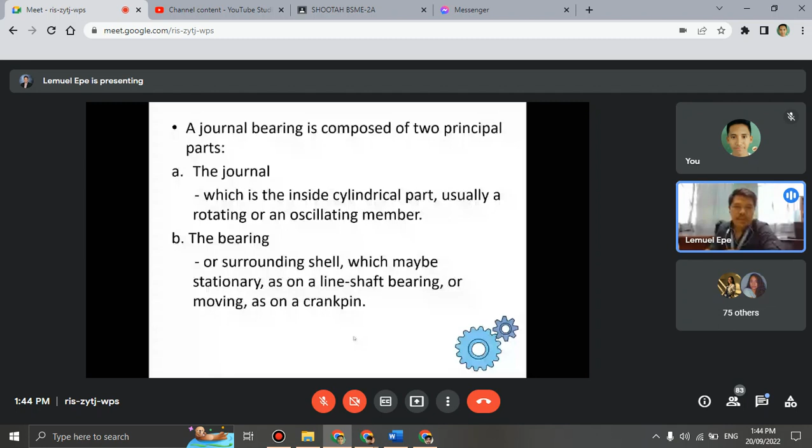You've probably opened a machine, like a combustion engine, where this is used on the crankshaft — that is called the journal. So that is an example of a journal bearing. Since there is direct contact between the bearing and the shaft, unlike the ball and roller where there is minimal contact with the shaft, for the journal the contact is large — covering the whole surface of the journal or the shaft.

Since there is a large contact area, we need to apply lubrication — that's where the lubricant is placed. And there's also a spacing, very small, that we cannot see with the naked eye. To determine the thickness of that spacing, we use a feeler gauge, or a thin sheet of metal.

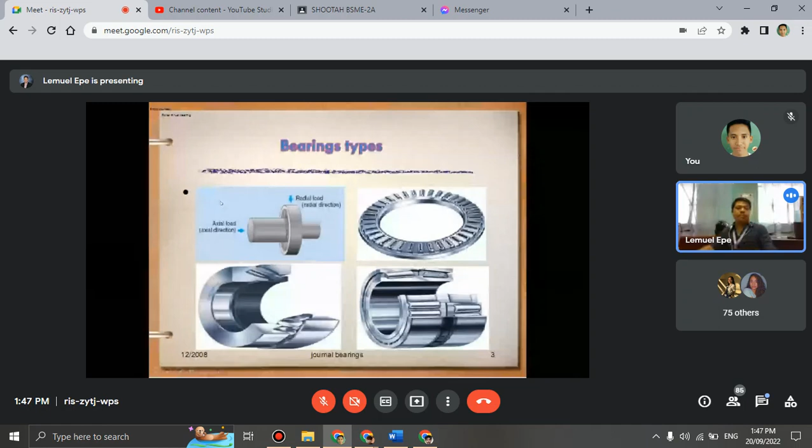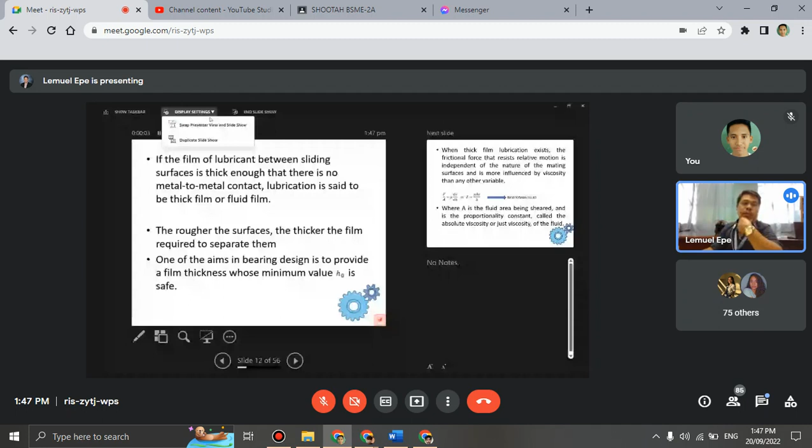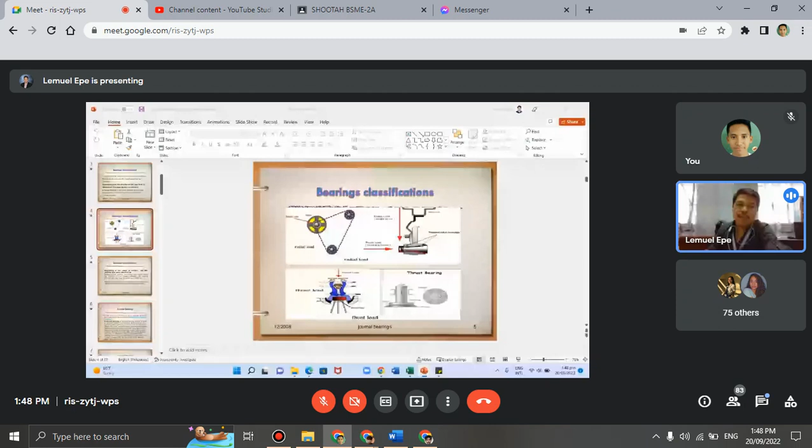So the rotating member, that is the shaft or what we call the journal — that's the journal. Then this part is the shell, which is the bearing. Okay, let's go back to the types. Okay, we're done with the types.

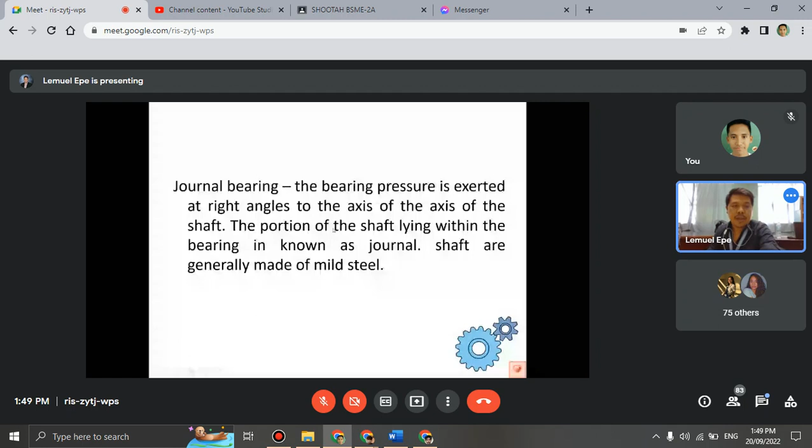The rougher the surfaces, the thicker the film required. This film is the lubricant thickness or the spacing, the minimum thickness of the lubricant oil. One of the aims in bearing design is to provide a film thickness whose minimum value is safe. Our symbol for the minimum clearance, based on the book of Faires, Design of Machine Elements, is h sub 0 for the minimum clearance or film thickness.

When thick film lubrication exists, the frictional force that resists relative motion is independent of the nature of the mating surfaces and is more influenced by viscosity than any other variable.

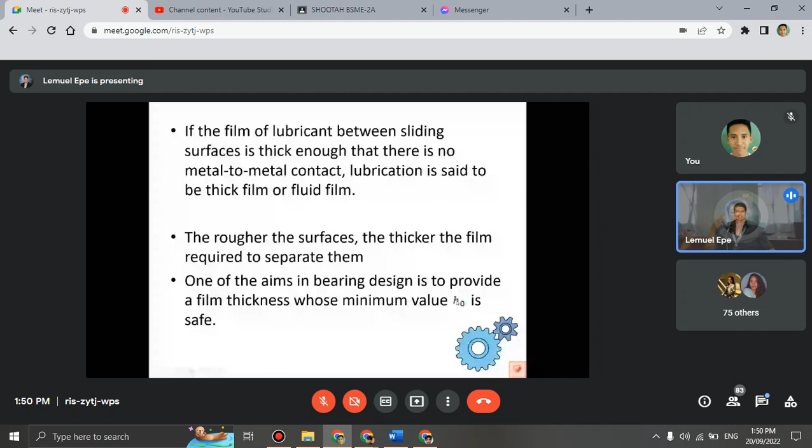From our knowledge in fluid mechanics, the shearing stress is proportional to the rate of change of speed with respect to the film thickness. So to make this an equation, we add a proportionality constant, and that constant is called the viscosity. We use the symbol mu for viscosity.

V here is the linear speed at the surface of the shaft. Let me draw this out better.

So this is the bearing, and the shaft or journal. The shear force is such that when you say shearing stress, the force is parallel to the area, that's stress as force per unit area. There are generally two types: normal and shearing stress. Normal stress is when the force is perpendicular to the resisting area, but for shearing stress, the force is parallel to the resisting area.

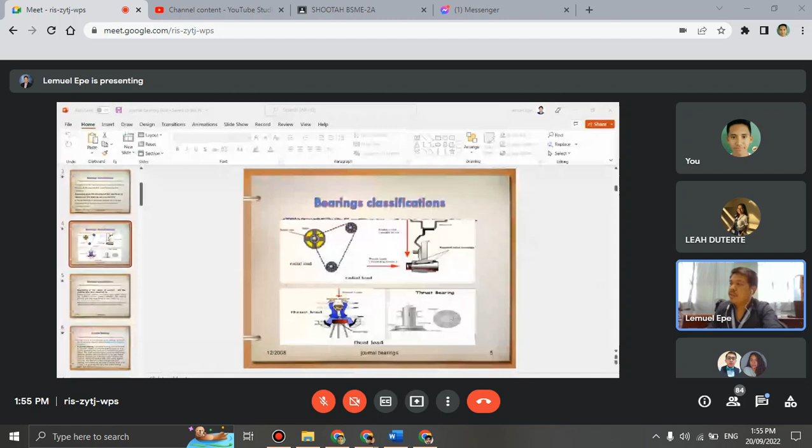So the diametral clearance is equal to the difference between the diameter of the bearing and the diameter of the shaft or journal. Now, if we want to determine the radial clearance: since diameter or radius is half of the diameter, the radial clearance is therefore half of the diametral clearance.

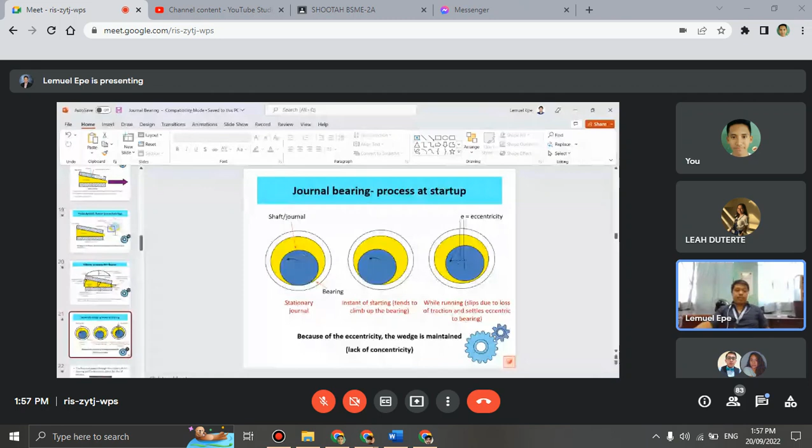Again, the diametral clearance is the difference between the diameter of the bearing and the diameter of the journal or shaft. And the radial clearance is half of the diametral clearance. So H here denotes the radial clearance.

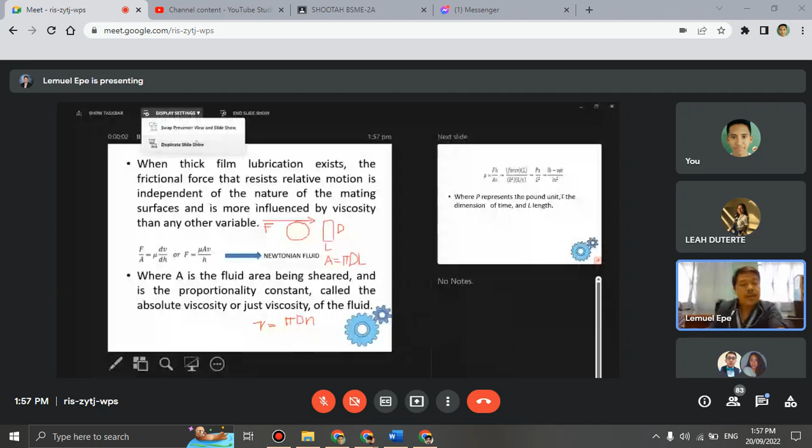So shearing stress is proportional to the velocity gradient, which is velocity over the radial clearance. To equate the two, we put a proportionality constant, mu, known as the viscosity or absolute viscosity. So we can write this to get the shear force.

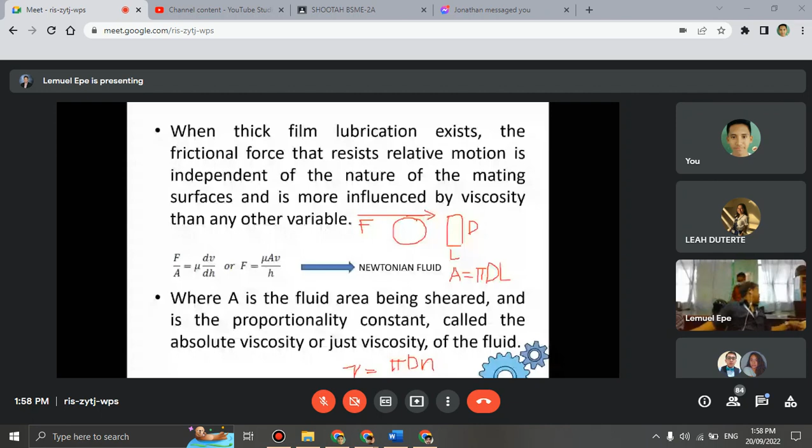Okay, let's proceed.

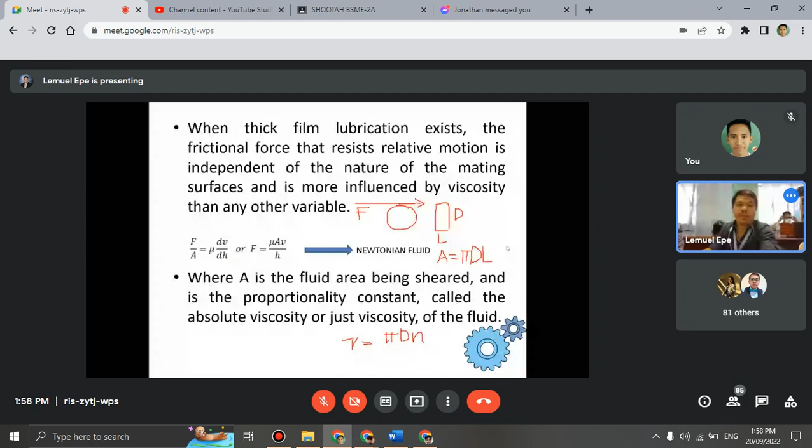So what is the unit of viscosity? In the English system, force is in pounds, H is in inches, area is in square inches, and velocity V is in inches per second. So the equivalent unit of absolute viscosity is pound-second per square inch, or PSI-second, since pounds per square inch is PSI.

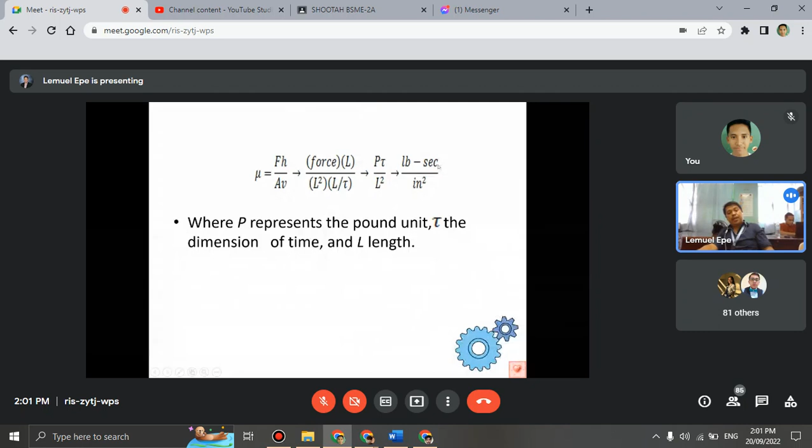Now if we connect this force to the frictional torque: we know that torque is equal to force times the radius. So we just multiply the formula for force by the radius of the journal.

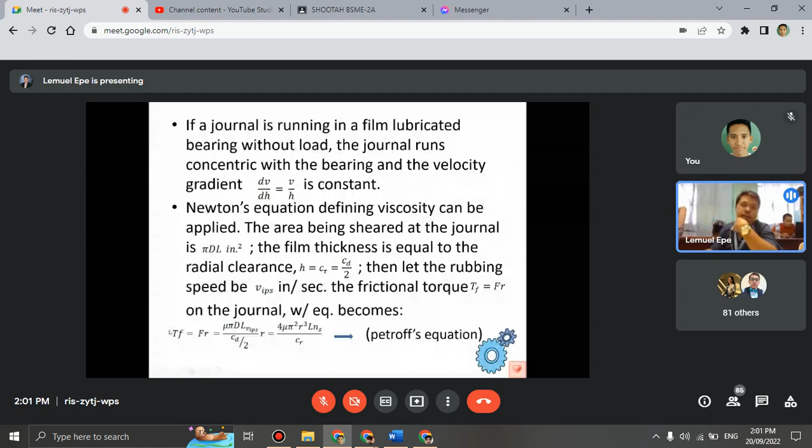When the surfaces in relative motion are so oriented that their motion causes the oil pressure to build up enough to support the load without metal-to-metal contact, the lubrication is said to be hydrodynamic.

So it seems like the shaft or journal floats due to the pressure build up. It's also called full film, thick film, or flooded lubrication. A thick film of lubricant is interposed between the surfaces of the bodies in relative motion, so there has to be pressure build up in the film due to the relative motion of the surfaces.

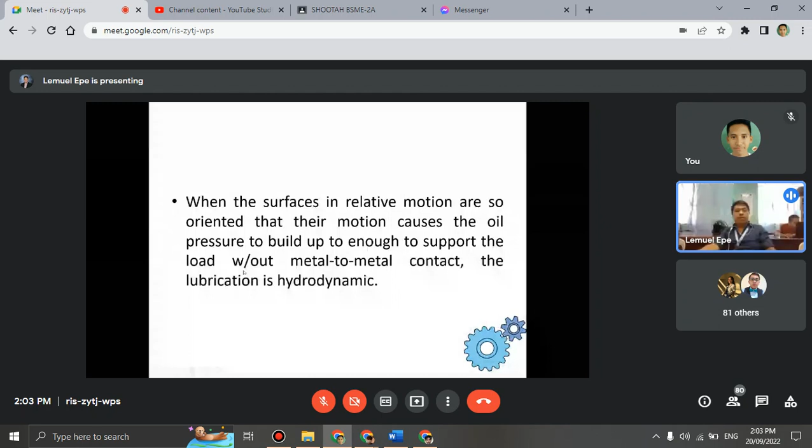So that is the hydrodynamic theory in journal bearings. Once the shaft is rotating, it does not touch the bearing, so there's enough pressure already to carry the load. So there is no metal-to-metal contact.

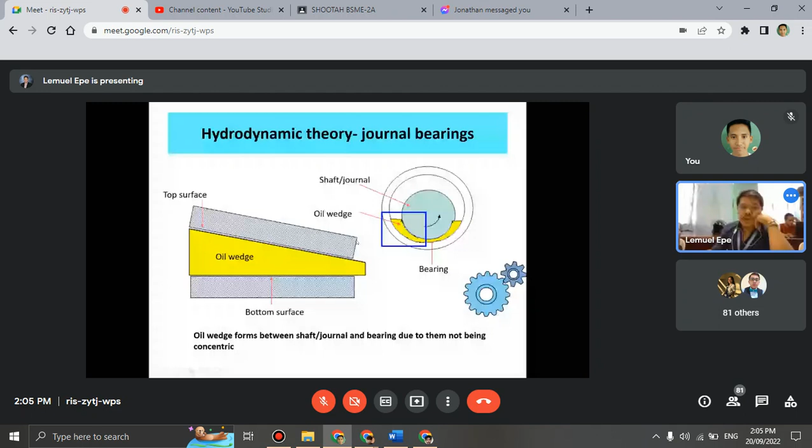Okay, this is the position of the journal or the shaft in this figure. When the shaft is stationary, this is the position. As you can see, the shaft touches the bearing at the bottom.

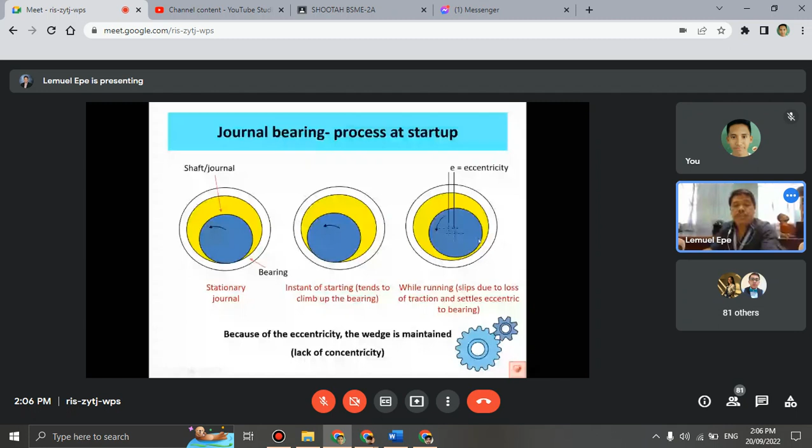So from that figure in the book of Faires, the eccentricity is equal to the radial clearance. Radial clearance is the diametral clearance C sub D over 2, minus the minimum film thickness, h sub 0.

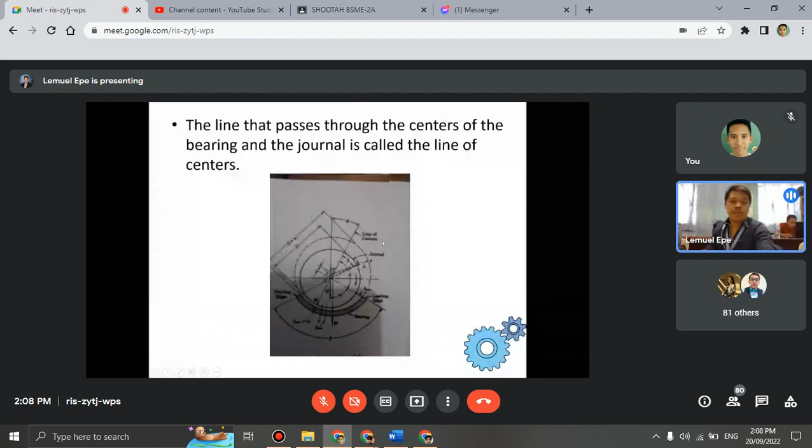The load carrying length of the bearing measured in a circumferential direction will be called the arc length, denoted L sub A. It is the arc of the journal or the bearing subtended by the angle beta. So the arc length is equal to radius times the angle subtended, in radians.

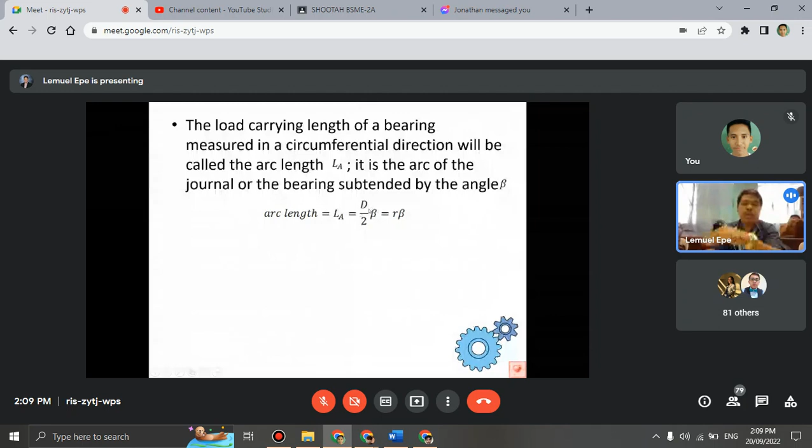Of the infinite number of solutions that can be found for a design situation, Kingsbury showed that for a particular surface supporting arc beta, there is a certain eccentricity ratio that results in maximum load capacity and another eccentricity ratio that results in minimum frictional energy loss. So the corresponding bearings are called optimum bearings.

Especially in bearings subjected to heavy loads or large frictional losses, the designer may be well advised to work towards an optimum. The various optimums are defined in the headings of tables - those variables or constants I mentioned earlier. We can see them in tables 20 to 23 in the book by Faires.

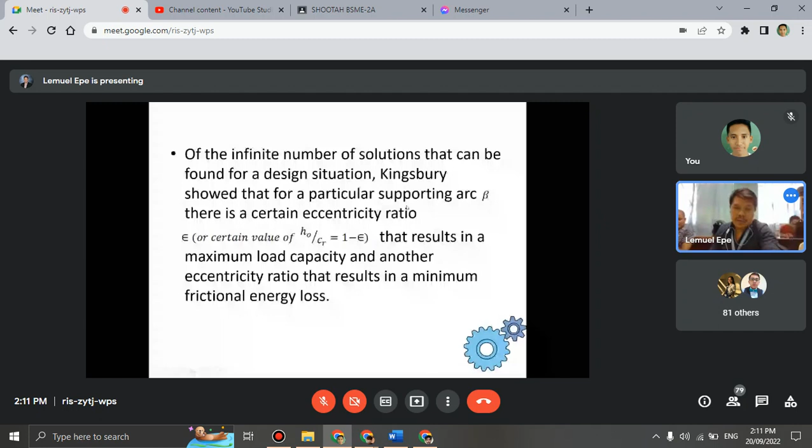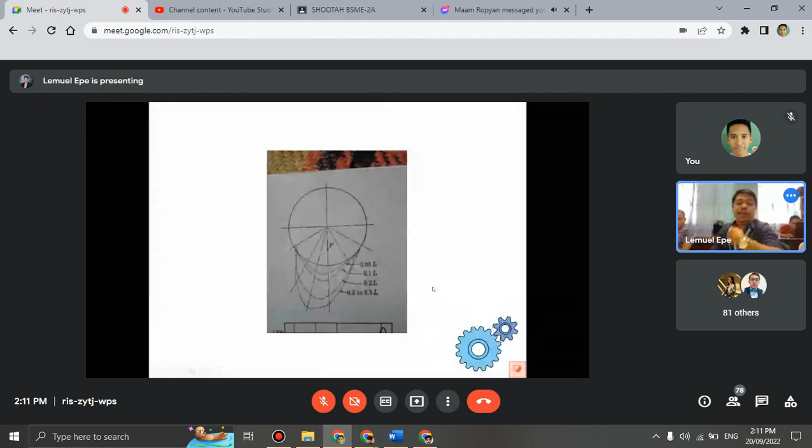Since there is friction, even with lubricant, there is still friction, but it's minimized because of the lubricant. So the energy from the source or the driver, the electric motor, isn't it equal to the output power? So there are losses, converted into another form. This is the heat loss due to friction between the journal and the lubricant.

So to compute that, we'll use this basic formula for heat: Q equal to m c delta T. But the symbol used here for mass is W.

So the mass is also equal to the product of density and the volume flow rate, since this can be a mass flow rate too. Density is equal to mass over volume, so this can also be mass flow rate over volume flow rate. So mass flow rate is equal to the product of density and the volume flow rate. But the symbol used in the book of Faires is different: mass flow rate is W and volume flow rate is Q, small letter q.

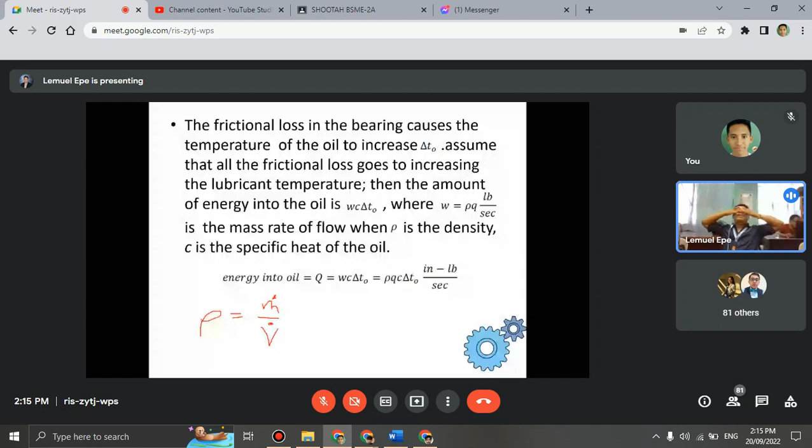So this is equal to the heat loss, Q, which relates to the mass flow rate. This heat is per unit time, so it ends up being expressed per unit of power, as a rate of heat loss.

In the design of an actual bearing of any importance, one should probably investigate the effects of changing some parameters over which there is control, for example the clearance or clearance ratio. This is the relation of the radial clearance and the minimum film thickness.

So we have here the standard clearances, depending on the shaft diameter or journal diameter and the material used for the shaft.

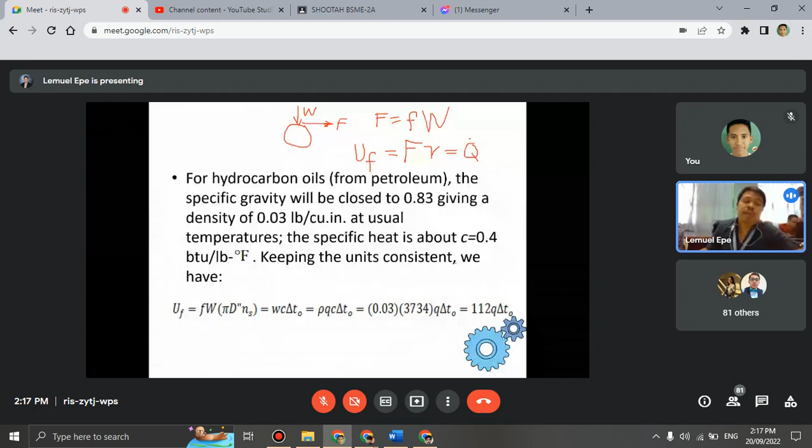The heat loss can also be estimated using this convective heat transfer formula, where H is the convection heat transfer coefficient, times the area and the difference in temperature.

An old rule of thumb states to allow a heat loss in still air of 2 BTU per hour per square foot per degree Fahrenheit. So h_cr in foot-pounds per minute per square inch per degree Fahrenheit is equivalent to 0.18.

In still air, let's say inside the room, still air.

We also have some approximations adapted from Fuller, which may be used in connection with the equation for temperature ranges that will be reasonable. So for the temperature difference between oil and air.

For oil-ring bearings to air, still air, the delta T is 2 times the delta T of the bearing.

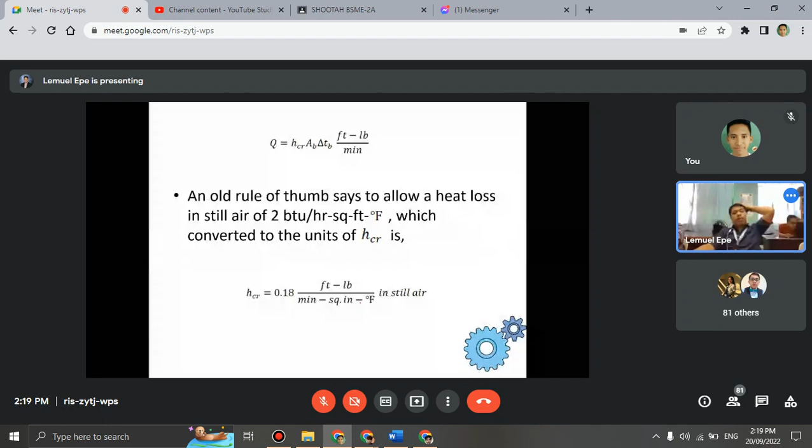For oil bath bearings, in still air, delta T is equal to 1.3 times the bearing temperature difference.

Then waste-packed bearings to still air: 2.5 times delta TB.

For the bearing area, this is used in the heat transfer equation, H times area times delta T. So that's the approximation.

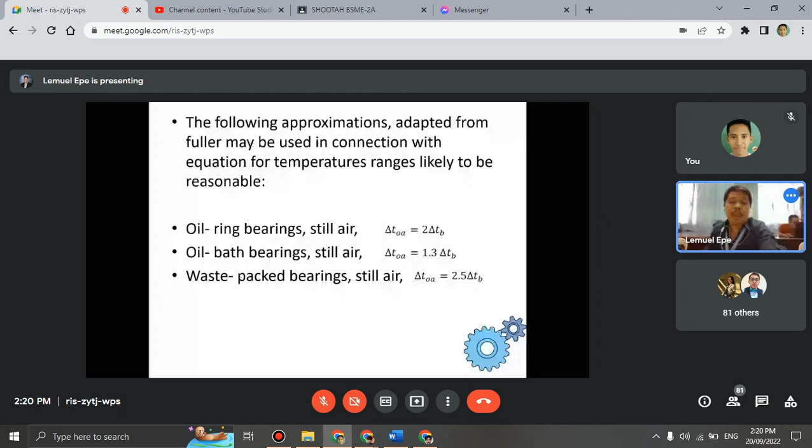Still, the unit is square inches. Fuller recommends an average of 12.5 DL for simple pillow block bearings, and 20 DL square inches for pillow blocks with separate shells. So it needs to be a pillow block.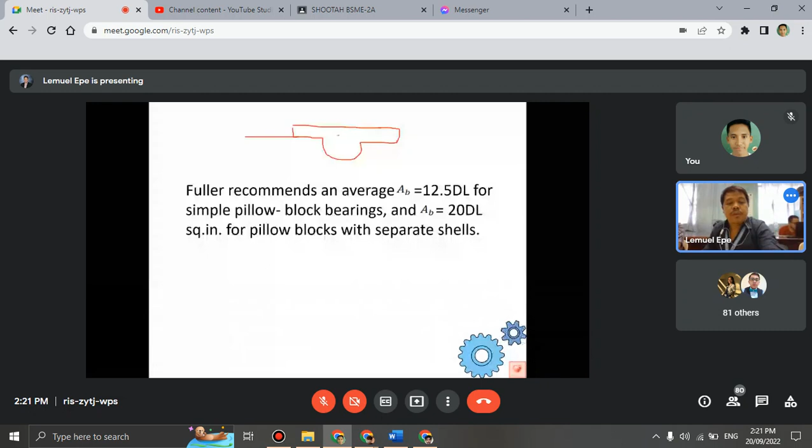Thrust bearing is used in beam mountings, propeller drives, turbines, etc. Here the shaft, unlike other bearings, passes through and beyond the ring. Sometimes thrust bearing is called collar bearing.

Okay, so this is the topic about what thrust bearing is, related to ball bearing.

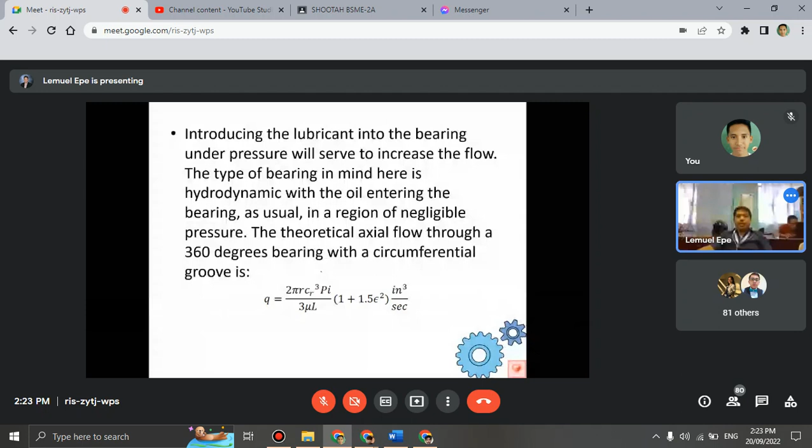Let the diameter of the shaft be given, so the shearing stress is equal to force F, the tangential force, over the surface area of the shaft enclosed by the bearing - that is, the pi D times the length of the bearing.

So the shearing stress is proportional to the velocity gradient. The velocity gradient is the velocity over the radial clearance. To make them equal, we introduce a proportionality constant, which is the absolute viscosity. So now we create the formula.

Then the torque, or frictional torque, is the tangential force times the radius of the shaft, or diameter, or radius, d over 2.

So the power loss due to frictional force is equal to frictional force times the linear speed. This is also equal to the mass flow rate of the lubricant oil times the specific heat of the oil and the difference in temperature.

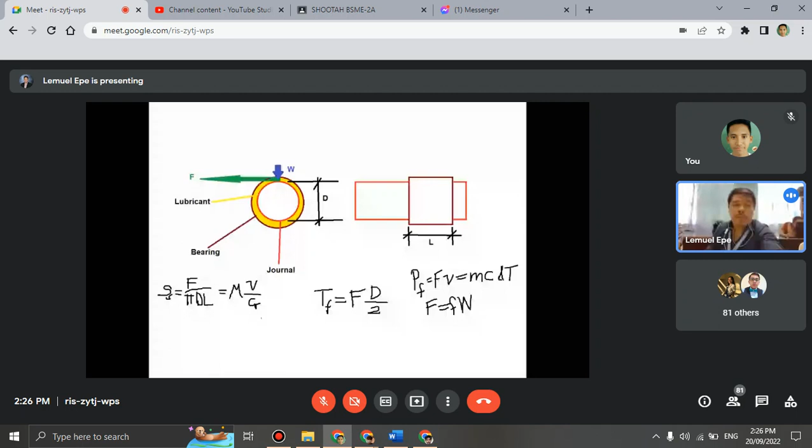So, journal - isn't that journal? Okay, here's an example on journal bearing. Happy birthday, Mana.

Journal bearing - this is a simple bearing in which a shaft journal rotates in a bearing with a layer separating the two parts to avoid wear effects.

I think this is familiar to you. This can be found in the combustion engine. This is the crankshaft, and connected to the crankshaft is the connecting rod.

So in the connecting rod, you place the journal bearing here. So here we have the journal, connected to the insert, which is the connecting rod, and the connecting rod connects to the piston.

So, types of sliding journal bearings. We have full journal bearings, where the angle of contact of the bearing with the journal is 360 degrees. That's why it's called full journal bearings.

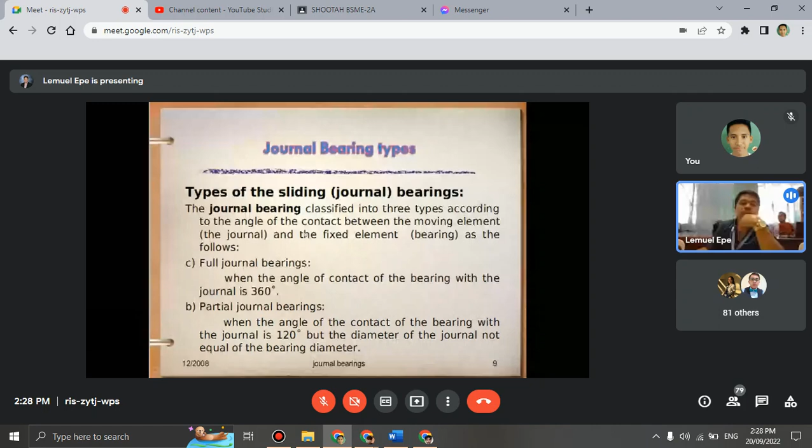Next we have partial journal bearings. Here the contact between the bearing and the journal is only 120 degrees.

So when the angle of contact of the bearing with the journal is 120 degrees, but the diameter of the journal is not equal to the bearing diameter.

Now the fitted journal bearings - when the angle of contact of the bearing with the journal is 120 degrees, but the diameter of the journal is equal to the bearing diameter.

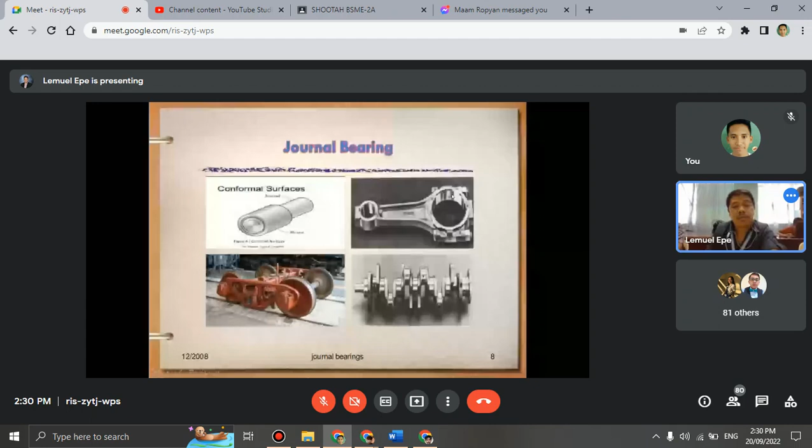So thick film is hydrodynamic lubricated bearings. When it's thin, that's thin film, partially in contact - so it does contact but only partially.

Properties of sliding contact bearings: we have compressive strength. The bearing material should have compressive strength to withstand the maximum pressure so as to prevent extrusion or other permanent deformation of the bearing.

Next is fatigue strength. The material should have sufficient fatigue strength to withstand repeated loads without developing surface fatigue cracks.

Another property that must be present in a journal bearing is conformability - it is the ability of the bearing material to accommodate shaft deflections and bearing inaccuracies.

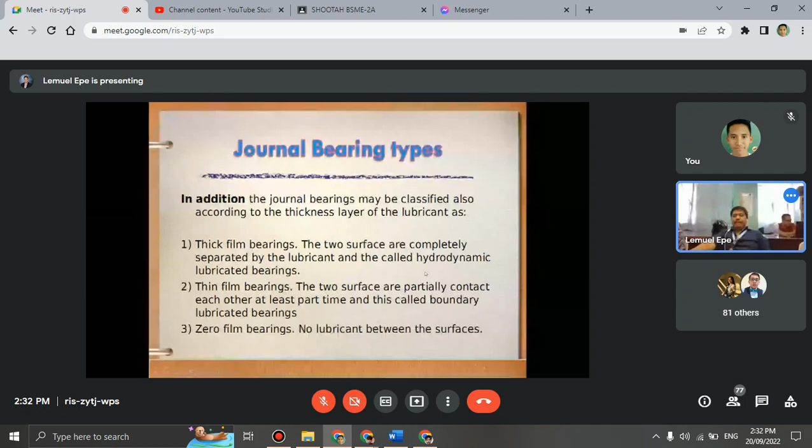Ay, I'm back. Hello? Can you hear me? So, sorry, the internet. Okay, let's continue.

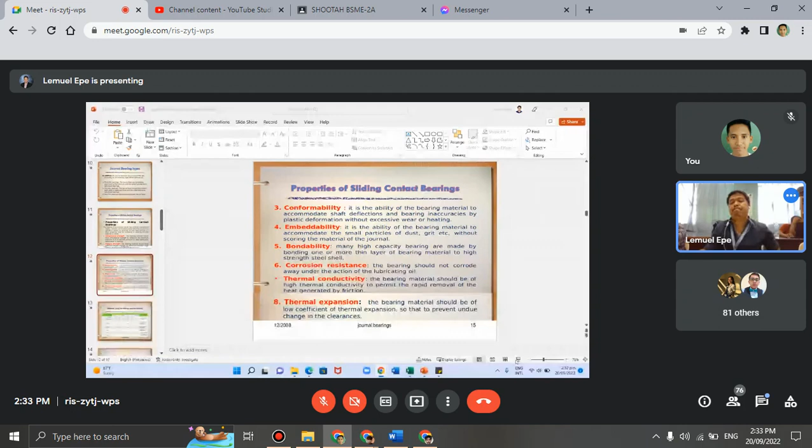So another property that must be present in a journal bearing is embeddability. It is the ability of the bearing material to accommodate small particles of dust, grit, etc. without scoring the material of the journal.

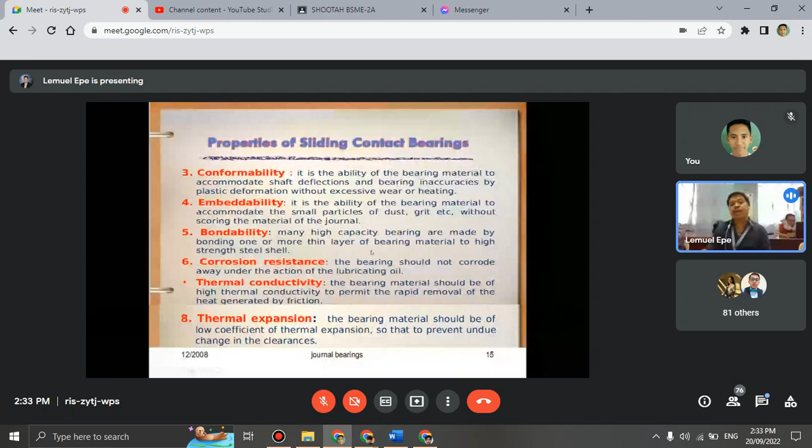Bondability - many high capacity bearings are made by bonding one or more thin layers of bearing material to a high strength steel shell. It must also be corrosion resistant.

So I have here a sample problem. I have already posted this in our Google Classroom, so please check that and try to read it. Pardon any typographical errors. Okay, example, a 6 by 6.

Diameter and length of the journal or bearing, so D times L. Diameter of the journal by length or width of the bearing. So a 6 by 6 inch full bearing has a frictional loss of 11 horsepower.

When the load is 68,500 pounds and angular speed of 1,600 RPM, the CR or radial clearance to radius of the journal ratio is 0.001. Letter A, compute the minimum film thickness. Is this in the vicinity of that for an optimum bearing? Letter B, what is the viscosity of the oil and a proper grade for an operating temperature of 160 degrees Fahrenheit? Letter C, for the same minimum film thickness, but for the maximum load optimum, determine the permissible load and the frictional horsepower.

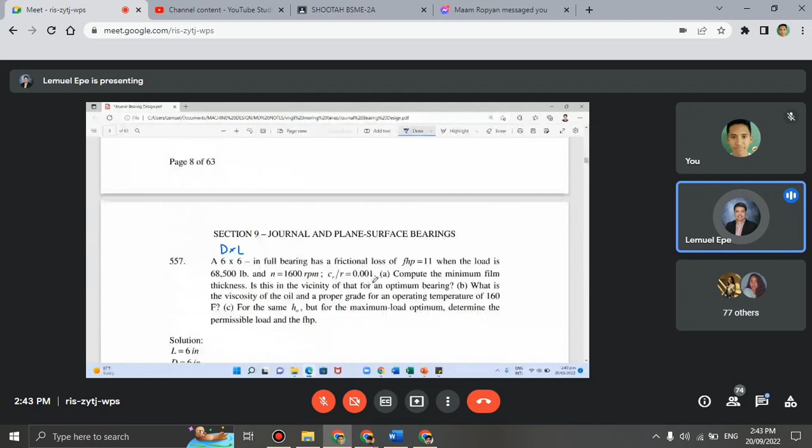So for an optimum bearing, then for letter B, what is the viscosity of the oil and a proper grade for an operating temperature of 160 degrees Fahrenheit? Still, based on table AT 20 with L over D ratio of the length and diameter of the journal equal to 1, and R over CR times F of 2.11.

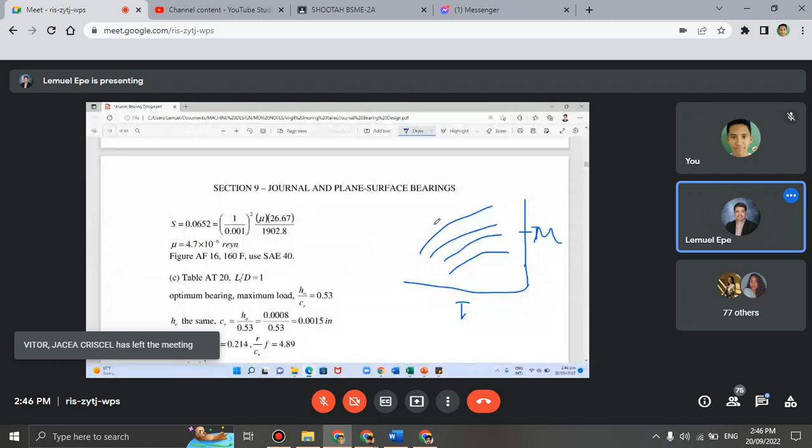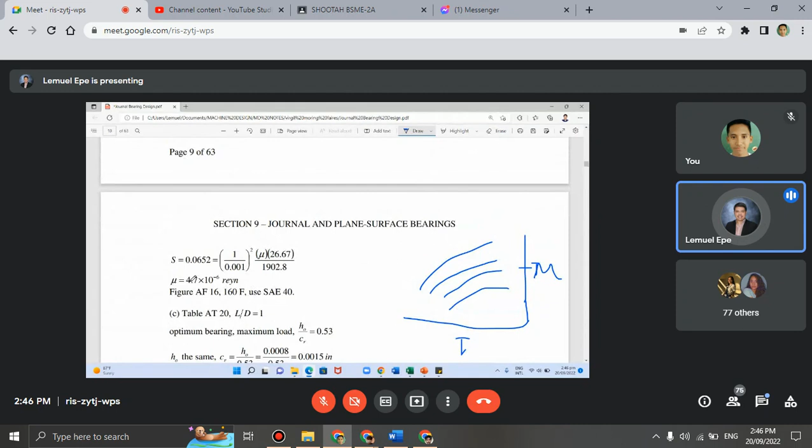So with a viscosity of 4.7 times 10 to the power of negative 6 reyn, the temperature versus viscosity is on the vertical axis. The curves depend on the class of oil and its viscosity. So you intersect the temperature of 160 degrees Fahrenheit with the viscosity to get the oil. So from table/figure AF16, we find we need to use SAE 40 oil.

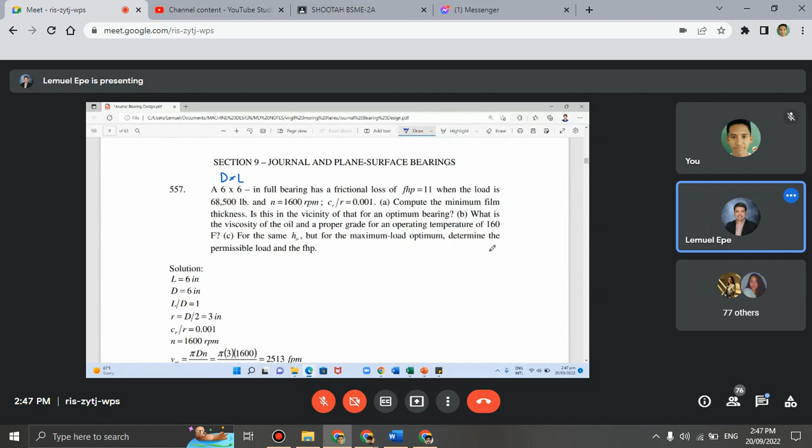Then for letter C, this is the required part: for the same minimum thickness, but for maximum load optimum, determine the permissible load and the frictional horsepower.

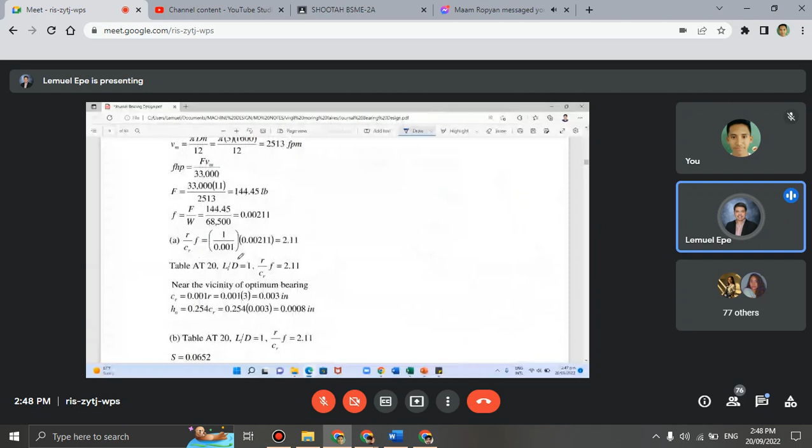With L over D equal to 1, the optimum bearing with maximum load is H over CR equal to 0.53. We can see this in table AT 20. So with the same film thickness, HO, this H value stays the same, from table AT 20.

So we can get the value of the radial clearance. The radial clearance is 0.005.

So with that, using the Sommerfeld number, or the formula, we get the bearing pressure equal to 2,343 pounds per square inch.

So how do we get bearing pressure? Bearing pressure is equal to the load W over the bearing area, equal to D times L. So pressure times DL gives us the load W, which comes out to 84,348, this is the load.

This is the permissible load. Now for the permissible load and the frictional horsepower, we need to get the value of the permissible load, and also the coefficient, the equivalent coefficient of friction.